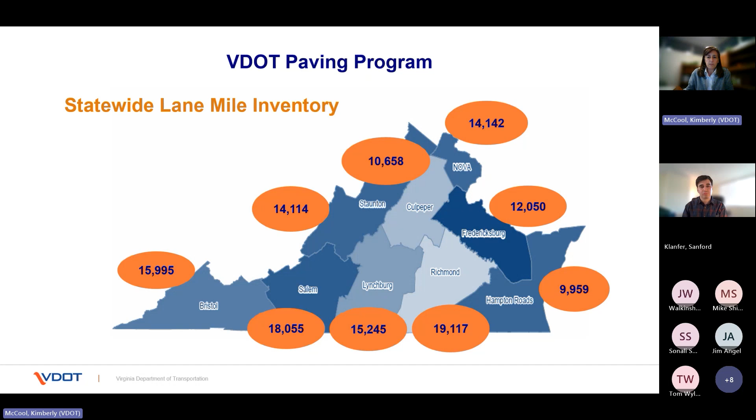Out of that over 14,000 lane miles of roads, roughly 51% is within Fairfax County, which is obviously the lion's share. Within Loudoun County we have about 25%, and Prince William about 22%. Arlington is only 2% of that 14,200, because Arlington County maintains their own secondary roads.

The planning and construction for the paving program is a year-round project that we're continually working on. Construction is only seasonal during the warmer weather months when we can put down asphalt, generally April through October or November depending on temperatures. But planning is year-round.

We gather data for the next calendar year in the spring and summer. In the summer and fall, we're going through that data, looking at schedules, and preparing contracts for the next year. We advertise the contracts towards the end of the calendar year, and close out the prior year's contracts after their season is over in November. In the winter months we get the bids back and execute the contracts, usually in the February or March timeframe, and give contractors notice to proceed.

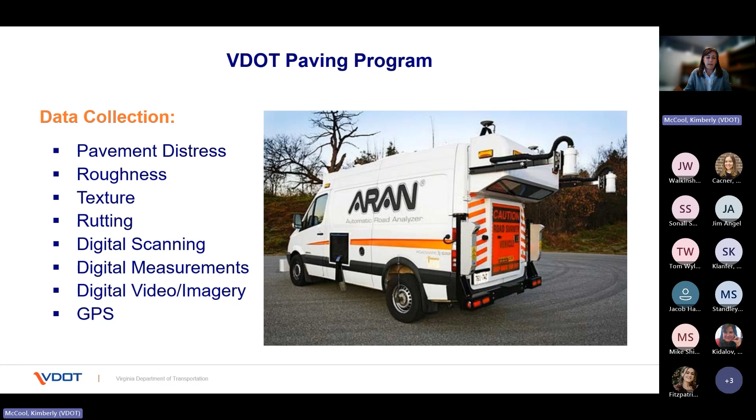This next slide shows our automatic road analyzer, which is how we collect data on the roads. You may have seen this out on the roads at some point. It drives all the roads and takes in data that includes pavement distress, roughness, texture, and rutting. It can measure cracks, crack size, number of cracks, and spacing of cracks. It's enabled with digital scanning capabilities, taking digital measurements, video, and imagery, and all of that is GPS-based so we can come back to the office and see where all that data was gathered.

We gather that data on an annual basis for interstate roads, primary roads, and high-volume secondary roads—those with traffic higher than 3,500 vehicles per day. For lower-volume secondary roads, we cover about 20% of those every year, with the goal of covering every one of those roads every 5 years.

So once the data is collected and analyzed, it's combined into a rating called the CCI number, the critical condition index. We look at our roads as a program, looking at the sufficiency percentage, which is the percentage of lane miles that have a CCI score greater than or equal to 60. Those roads are considered sufficient, and anything lower than 60 is poor or very poor condition, and those are the roads we'll be targeting for our paving program.

A question we often get is, what does the CCI look like? A road in excellent condition, which is 90 to 100, is really your new roadways, newly paved or newly constructed. The middle image shown is a CCI of 50 to 59 with a significant amount of cracking, and that would be targeted for the paving program. The lower two photos are very poor CCIs, approximately a CCI of 35. That's very poor condition, and we're actually not allowed to have any interstate pavements with a CCI score of less than 35.

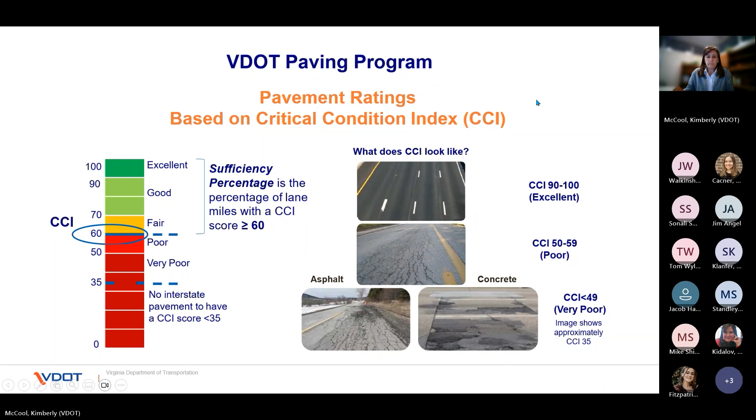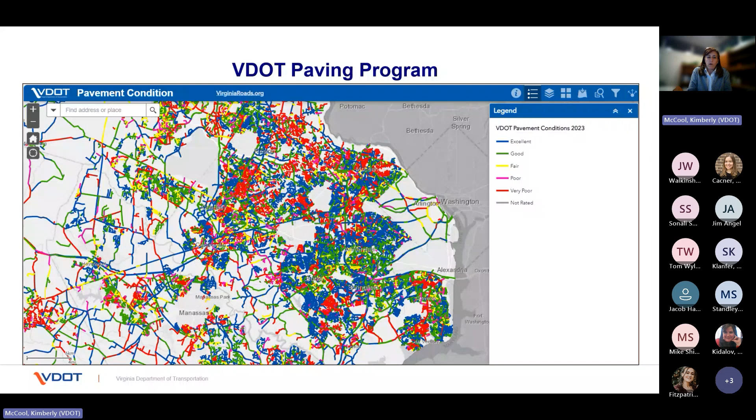This next image is our GIS map of the pavement condition ratings. This is a screenshot available online, from 2023. If you're ever wondering what the pavement condition is in your neighborhood, on your street, or anywhere within the state, it's available on our website. As you can see, it's color coded, blue being excellent condition down to red being very poor condition. So areas where you see red are where we'd be targeting our paving program, or hopefully there's some other project going on there.

The VDOT paving program generally does two types of pavement treatments. For the most part, we do preventative maintenance, which is slurry seal, latex, or chip seal. We may do minor patching with those or some crack seal, but that preventative maintenance is targeted to extend the life of the pavement. These seals are somewhat similar to what you might see on your driveway, but a little more complex, really just a top seal to extend the life. The bulk of our program is the plant mix, where you see the milling and the overlay. Sometimes there's some patching and corrective maintenance. The restorative maintenance is a little more detailed, with a bit deeper milling, but both plant mix types are the bulk of what you'll see in the paving program.

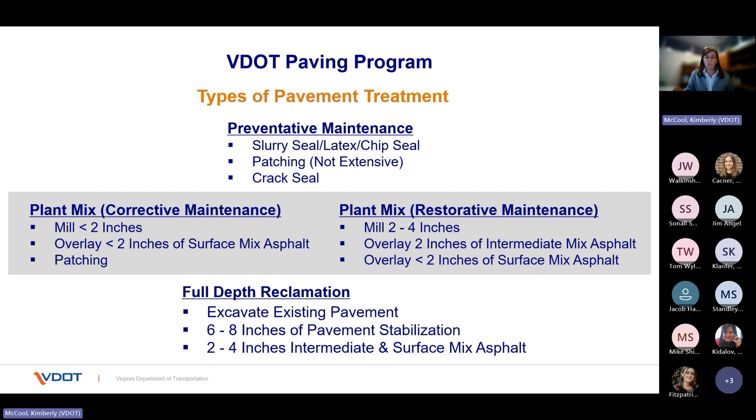The full depth reclamation projects are very rare. They would be for a road that's in really very, very poor condition and probably very old. We might encounter one of those occasionally, but for the most part, we're doing mostly preventative maintenance and plant mix.

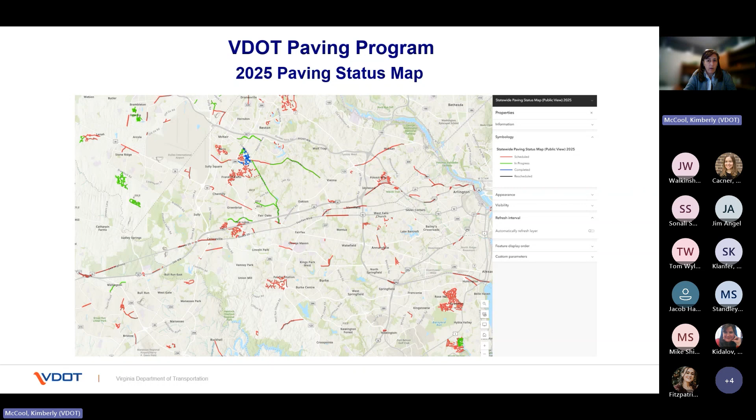Okay, and then the pavement marking and striping is not as large of a portion of our program. Generally, during the paving program, we're going to go back and replace the existing striping in kind, so whatever was there before is what will be restriped.

Occasionally we do make some changes to the pavement markings. We'll make some minor adjustments, such as edge lines, perhaps adjust crosswalks or do a high visibility crosswalk where before it was just the regular two-bar crosswalk. Sometimes we're able to lengthen turn lanes or create turn lanes if pavement exists.

And then we do coordinate with Fairfax County to look for locations where we can enhance the on-road bike networks, or coordinate some kind of pedestrian improvements or road diets, even making lanes narrower to provide a wider shoulder. But any location where we've planned on doing some paving where maybe there's the opportunity to take advantage of implementing something that's also needed just through restriping is always a bonus.

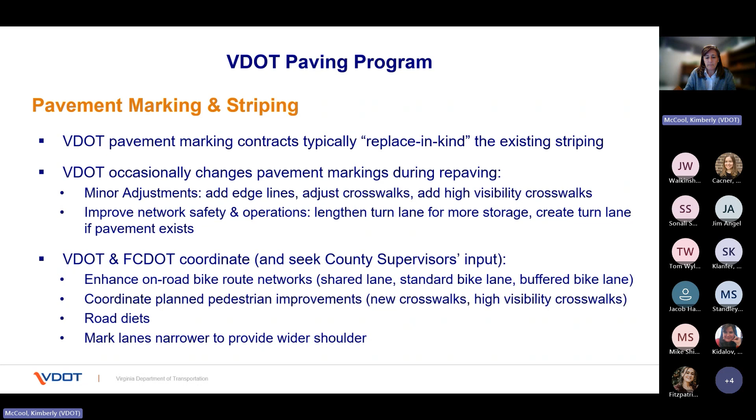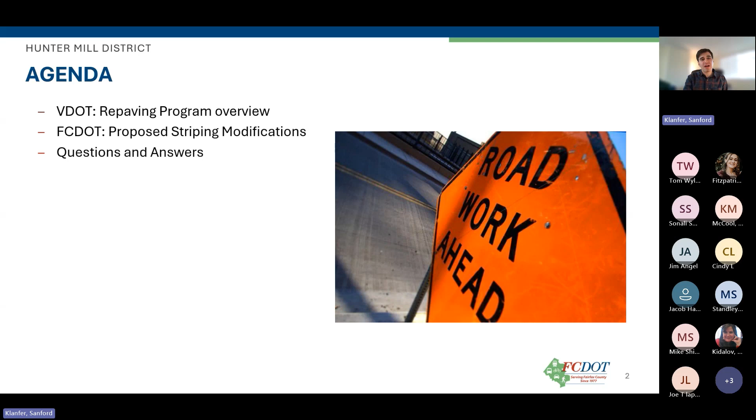You just heard Kim's very informative presentation giving you an overview of this program. I'm going to be speaking to you today about some of our proposed striping modifications, and then after that we'll have a question and answer session.

Just so we're all aware, all of these proposed striping modifications that I'm about to talk to you about are subject to VDOT approval. So just because we're showing them to you today doesn't necessarily mean we're going to be able to make them happen, but hopefully we will.

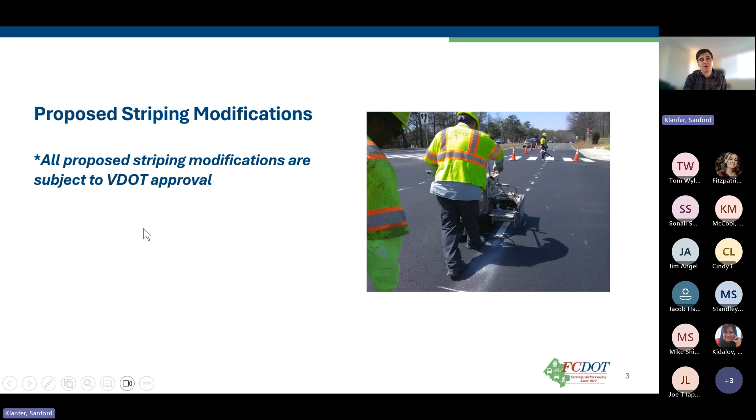This program, as Kim mentioned, is a collaboration between VDOT and FCDOT. VDOT figures out which roads are going to be repaved each year. Then we review that paving plan, and we at FCDOT identify opportunities for improvements, new marked crosswalks, new bike lanes, opportunities for narrower lanes. Then VDOT develops striping and signing plans and coordinates the implementation.

We at FCDOT then lead the public engagement, like the meeting we're all in now. VDOT will, as part of this process, identify and reconstruct any substandard curb ramps for accessibility, and any signage that's required is at the end of the process installed by FCDOT.

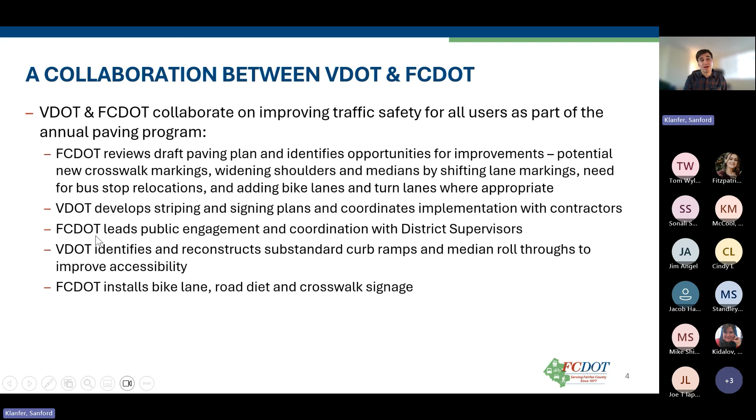So why are we doing this? Many of the roads in Fairfax County were built either with lanes that are wider than necessary, or too many lanes, and these conditions encourage people to drive too fast, drive inattentively, and that makes the roads less safe for everyone. So for us, the repaving program is an opportunity to right-size these roads, right-size these lanes, provide new bike lanes, and do all of that at a very low cost.

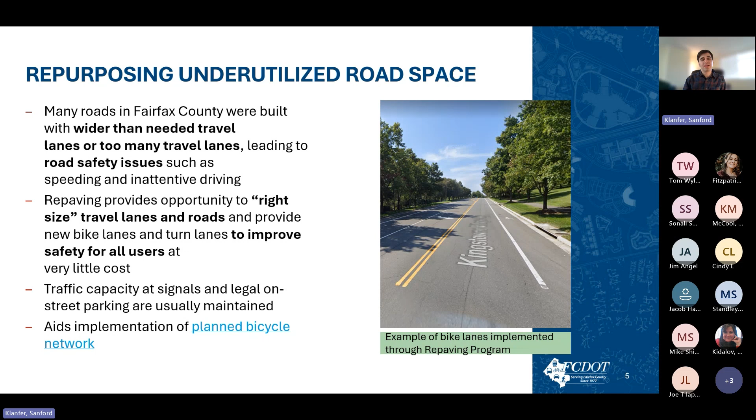When we do this, we are careful whenever possible to maintain traffic capacity at signals, to maintain legal on-street parking spaces. And another of the benefits of doing this is that it helps us implement our planned bicycle network, which is part of the county's comprehensive plan.

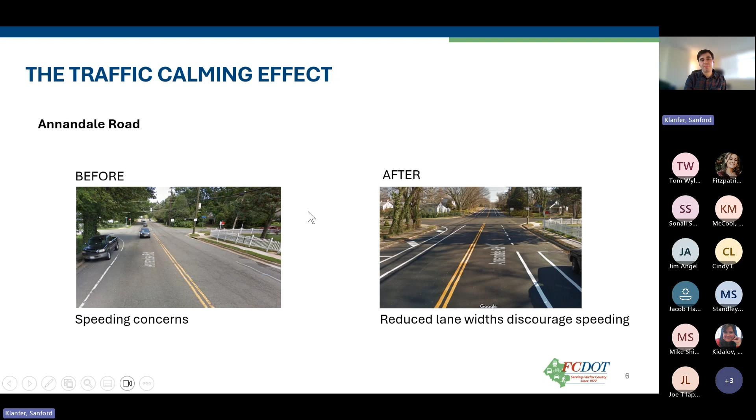So when it comes to painting bike facilities, there are three basic kinds. We used to mark sharrows, which are shared lane markings. We don't really use those anymore. Most of what we're painting now are either standard bike lanes or buffered bike lanes.

The difference between a standard bike lane and a buffered bike lane is that the buffered bike lane has a bit of extra space in between the bike lane and the vehicle lane. And that creates a little bit of extra safety and comfort for cyclists and makes it easier for us to come back later on and improve it further by making it a fully separated bike lane.

The reason that's important is that the more we can create those buffered or protected bike lanes, the more we're able to open up cycling to more users. The standard bike lanes are great for people who are really confident on a bike, who are willing to bike in lots of different conditions. But for a lot of people, that extra comfort, the extra feelings of safety provided by that buffer, by that vertical protection, makes a big difference. So that's why where we can, we try and create those buffered bike lanes.

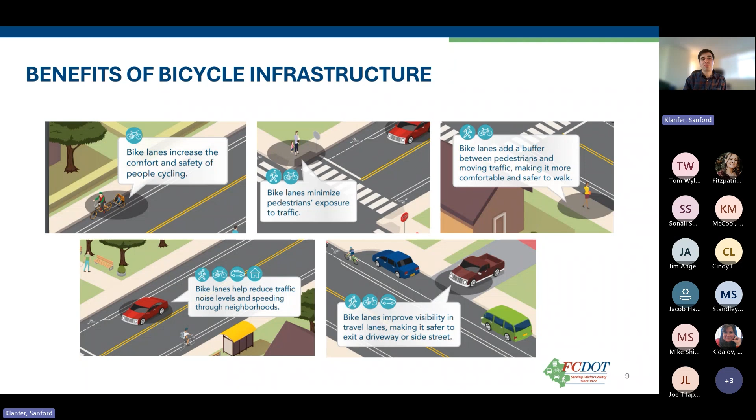So with that, I want to start with the one proposed bike lane project we have as part of the repaving program for these three districts. This is the proposed bike lane on Dellwood Drive. It would add a single one-way bike lane on the northbound side of Dellwood Drive. The reason we aren't doing bike lanes on both sides is because there just isn't enough width in the road.

This bike lane is dependent on VDOT approving us moving that center line over to make room for it. We put the bike lane on the northbound side because that's the side closer to the elementary school. That's Marshall Road Elementary School that this bike lane runs right past. And this bike lane will provide a connection from the 66 parallel trail to this elementary school.

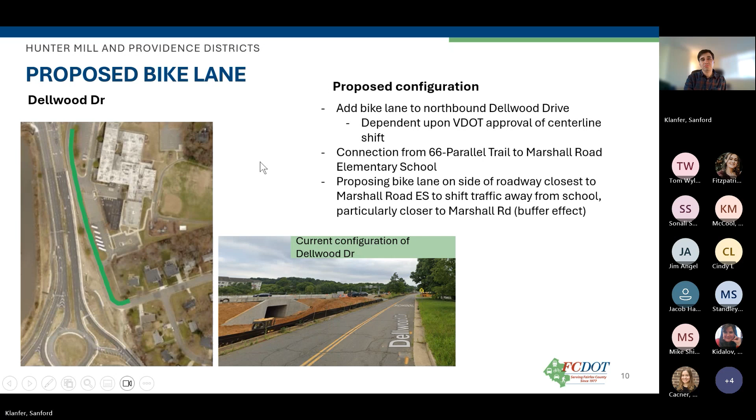In addition to that bike lane project, we also have a couple of proposed crosswalk enhancements. We look at pedestrian crossing locations where there aren't crosswalk markings, and we see if those crossings meet the VDOT warrants for marked crosswalks. We also check to see if there are any parking restrictions needed to improve the safety of the crossing.

VDOT requires that we can only put in these marked crosswalks in locations where the existing curb ramps already meet ADA standards. Where that's the case and where these marked crosswalks are warranted, we upgrade existing crosswalk striping to high visibility, especially near schools and near transit stations.

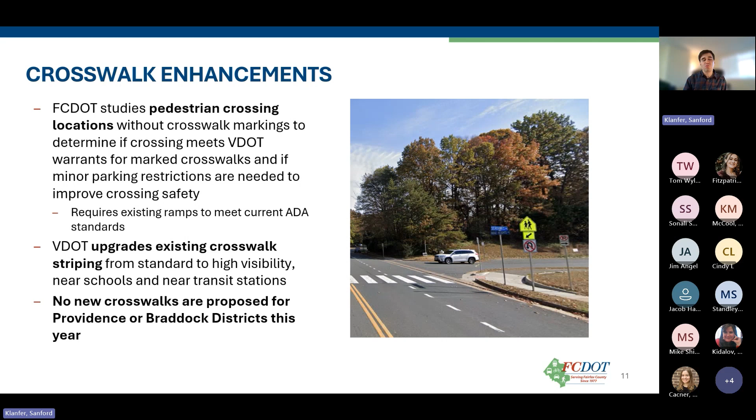We don't have any new crosswalks proposed for Providence or Braddock districts this year, but we do have a couple for Hunter Mill. One of these is at Wainwright Road and North Shore Drive. This crosswalk is for pedestrians crossing Wainwright Road. There are no parking restrictions necessary as part of this. For those who aren't familiar, Wainwright Road is a semicircular road that intersects North Shore Drive at two places.

At one of those intersections, it already has a marked crosswalk. At this intersection, which is the further west of the two, we are proposing this new marked crosswalk. This marked crosswalk is about a quarter mile from Lake Anne Elementary School, so we expect it will help students and parents walking to that school.

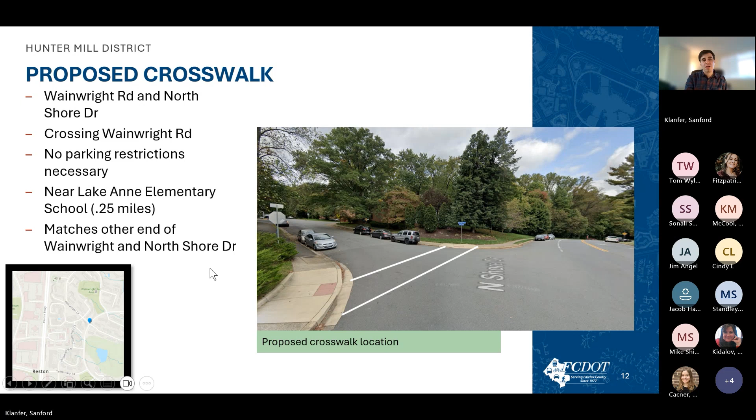The other proposed crosswalk is at Mustang Drive and Mountain View Court. It's for folks crossing Mustang Drive. That trail you can see on the right side of the image connects to Floris Elementary School, so once again we expect this crosswalk will be valuable for students and parents walking to school. In this case, there are no parking restrictions necessary on this street because it's too narrow for legal street parking.

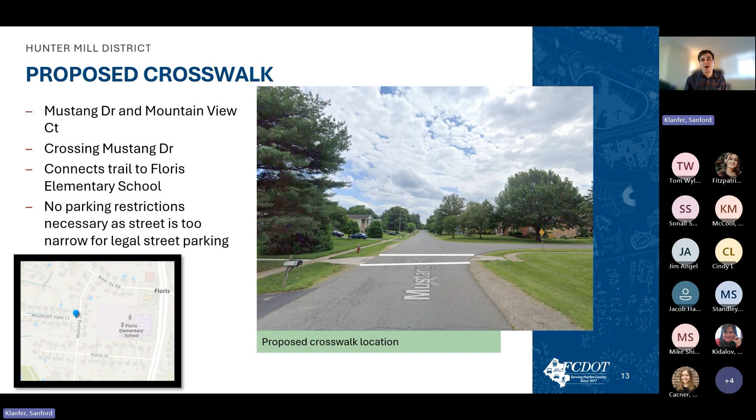And just to reiterate one more time, both of these crosswalk proposals are still pending VDOT approval.

With that, we are going to open it up for questions, and Hannah will let you know how that works.